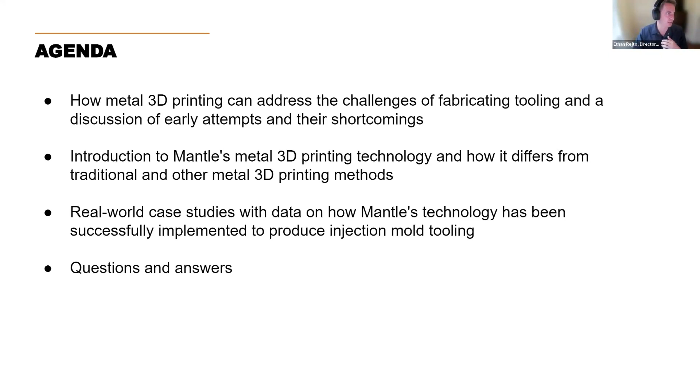As I'm sure many of you know, if you're here today on a plastics webinar, you know that the products that surround us every day are manufactured with precision metal tools, mold toolings, whether it's a plastic part or a metal part or any sort of part. All those parts are made with precision metal tools.

But as I'm sure many of you know, there's a lot of challenges associated with tooling. Whenever we're talking to companies that are producing tooling, they're telling us that it's slow, expensive, and very, very labor intensive. It's not unsurprising to hear 12 weeks to a 6-month lead time to produce your tooling before going into production, which is very, very long. Of course, it's costly, tens to hundreds of thousands of dollars to produce this tooling. So it takes a long time and it's very, very expensive.

When it comes to the business side of things, the supply chains and the tariffs, a lot of tools are made overseas, which adds to that cost and lead time and has some really difficult logistics associated with them. And then the number one thing we're always hearing from prospects is this lack of skilled labor, this desire to say 'I wish we could build more tooling in-house,' but there's just no way to hire more machinists, more tool makers, more people to run the CNC machines. Training someone to get up to speed with this takes 4 to 5 years minimum, and it's a very, very time-consuming and expensive process.

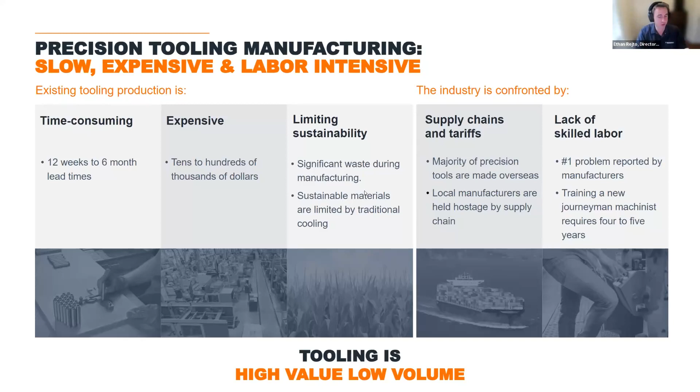All the parts that 3D printing to date have been very successful with are these very high value parts that are produced in low volume. Tooling is another one of those - you're not producing hundreds of thousands of tools, you're producing a few tools to produce hundreds of thousands of parts, making it a really good application for 3D printing. And 3D printing really presented itself as an ideal solution to all these challenges we just discussed.

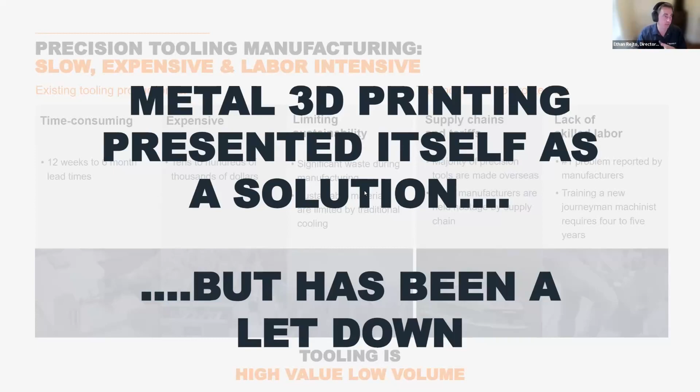But to date, it has really been kind of a letdown. When we talk to a lot of companies that have tried metal 3D printing for tooling, they generally tell us that they haven't seen a lot of value add outside of conformal cooling. The tooling industry really has some very unique needs that standard metal 3D printing technologies were not designed for.

In order to meet the needs of tooling, 3D printing has to be incredibly accurate. We go to shops that are talking about tenths, tenths of a thou. So we're looking at incredibly accurate parts, really like the most precise parts that are probably manufactured today.

So 3D printing has to be incredibly accurate. The parts need to be extremely durable and stable so that they're not moving at all during any of the manufacturing process. They have to be able to be produced faster than traditional manufacturing, because if you're not producing it faster than traditional, you're not really adding a lot of value. And the technologies have to be easy to use and to implement. That's really a big one - if the technology cannot be implemented into current workflows and be easy to implement, it's going to be very challenging to adopt.

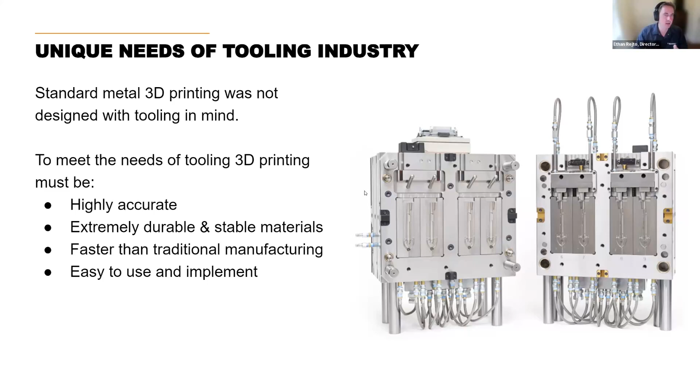Standard metal 3D printing was really not designed with these needs in mind. The most common method of producing metal parts via metal 3D printing today is this method called powder bed fusion. You may have also heard of it called DMLS, direct metal laser sintering, or SLM, selective laser melting, but essentially they're all very similar processes that involve building parts up layer by layer in a powder bed by using a laser to selectively melt and sinter metal powder together.

So you're going to spread a layer of metal powder, hit it with a laser selectively to build up that layer, spread another layer, hit it with a laser again. To date, this has really been the number one way to produce metal parts with metal 3D printing.

There's some advantages to this. You can produce parts in literally just hours. You can have something in your hands to hold. You can do these extremely complex shapes because you're able to build parts within a powder bed and really have almost infinite geometry, which lends itself very well to conformal cooling.

But there's obviously some disadvantages with this as well. The parts require really extensive post-processing to produce the surface finish and accuracies that are required for tooling, meaning that when you get a part off the printer, you're going to need to touch every single surface, either with grinding, EDM, or machining, so it can be usable with the surface finish and accuracy required for tooling. In addition, you have to work with these hazardous loose metal powders - you're going to need some HVAC, special rooms, and suits involved to work with the system. And all in all, it's relatively difficult to use to get a stable part out of these processes.

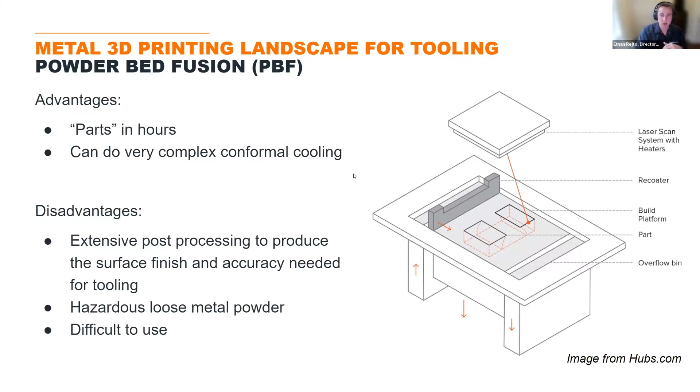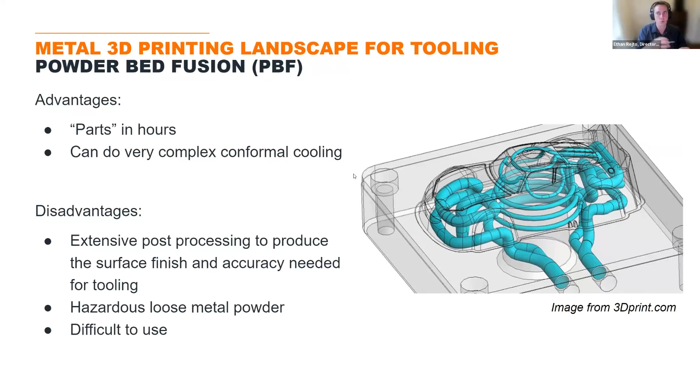So to date, most of the parts being produced for tooling with laser powder bed fusion or DMLS technologies look like what you're seeing on the right. They feature incredibly complex conformal cooling, because really the only way to justify this process, which requires so much post-processing and so much added cost and lead time, is to produce something like this, where you're outweighing those disadvantages with an intense advantage of conformal cooling.

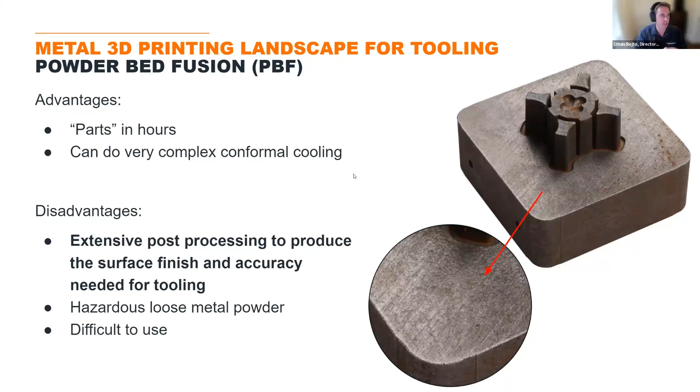So really, because of that extensive post-processing - we're looking at some DMLS parts here on the right - this has really limited the applications of traditional metal 3D printing, because you're really only sufficing this very beginning process of the tool building process. If you're familiar with tool building, which I'm sure many of you are, there's a lot of steps involved, and really traditional metal 3D printing technologies only suffice those first couple steps, maybe the soft milling step, if even.

The rest of the process is still left the same because of how much work needs to be done. So really, we saw that DMLS parts or powder bed fusion parts are really only used for extensive conformal cooling applications, and nothing really outside of that.

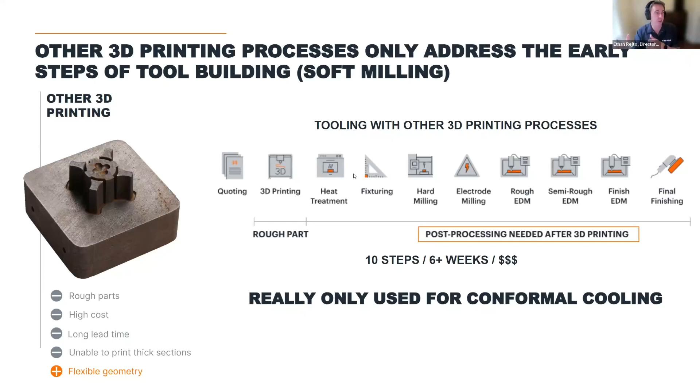So at Mantle, we kind of saw the current market of tooling, the challenges involved, the lead times, the cost, the lack of skilled labor. We saw the current offering that existed with metal 3D printing and the challenges that traditional 3D printing had with

meeting those needs of tooling. And we really saw an opportunity to design the only 3D printer that's designed specifically for tooling. Tooling is the only application we do here at Mantle. We don't build machine parts. We don't build parts for airplanes.

The only application we do at Mantle is precision tooling, and specifically injection mold tooling today. So I have a bunch of tools we'll look at later on, and I'll explain to you a little bit about how our process works and what makes it different. But I just want you to know that from the first day, we really designed our technology to meet those

needs that injection mold industry needs. We have a pretty different approach to metal 3D printing than those traditional laser-based approaches we just looked at. We actually start with a metal paste. It's a flowable metal paste, similar to the toothpaste you have in your bathroom and you probably used this morning. But we mix, our paste is a combination of metal powder mixed with some binder and some solvents.

That solvent allows that metal powder to flow in a way that is very safe and flowable without needing to be heated. So our feedstock, it comes in a tube, and it's a paste material that is very easy to flow. That's a combination of that metal powder, that binder, and that solvent.

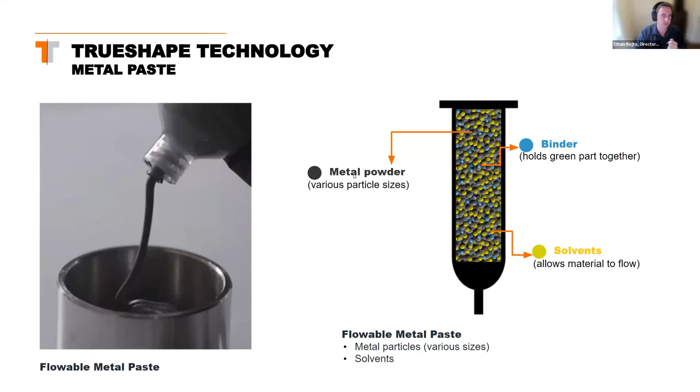The first step in our process is we're going to print it. We're printing it very similarly to an FDM printer or an FFF printer that you may have seen. You could buy one on Amazon now for a couple hundred dollars. We're just extruding material through a nozzle. In our situation, we're not even heating that material. We're simply pumping it because that solvent allows that material to flow and simply be extruded through material.

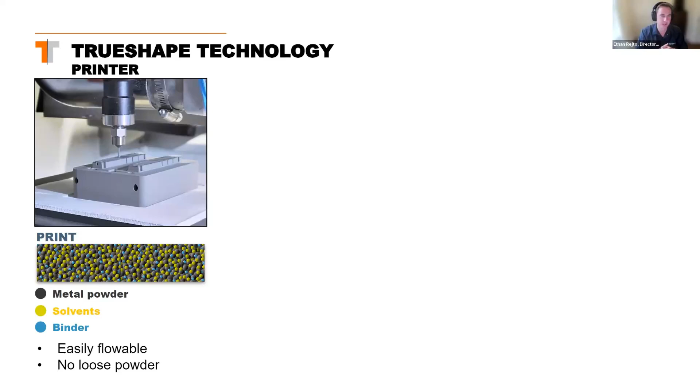So every single layer, we're going to print that material. We're going to come through and dry that material. Here, we're removing the solvent from that paste, and we're firming up the material a little bit, kind of into a dense foam. This allows the particles to kind of settle down a little bit. It densifies the material a little bit, but mostly we're removing the solvent here and turning it from a paste, like a toothpaste, into a dense foam.

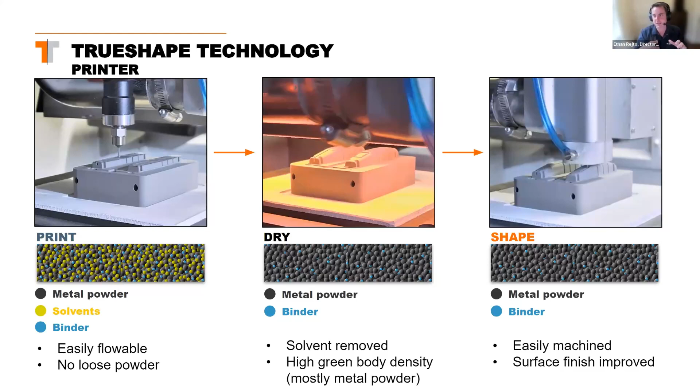Why that's so critical for us is because the next step here is going to be we're actually going to machine that. So we're building our printer inside of an existing RoboDrill style CNC. We're going to come through with 10 different cutting tools, and we're going to machine and refine that shape, which is why when you look at our tools, you don't see layer lines like you would with other technologies. You see feature details that are very, very, very precise, some tiny features that would have been impossible to produce by simply just extruding material.

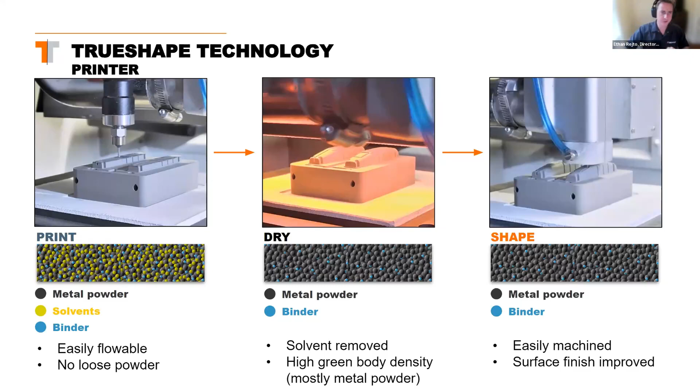So it's a hybrid approach where we're printing, drying, and shaping, and this is going to happen every single layer. So every single layer is going to be milled flat and have some contour milling done every 10 layers to refine that shape and produce these really, really nice looking parts.

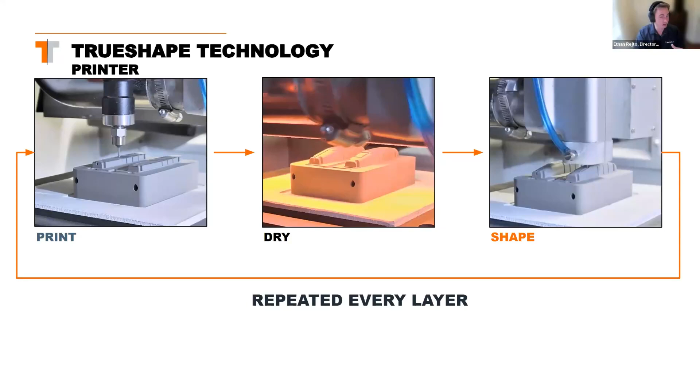What comes off the printer we call a green part. It's still a combination of metal powder that's only being held together with some binder, but we're going to go ahead and put it into a furnace to do a sintering process. You can kind of think of a clay pot. You're gonna form it in a soft state. You're gonna put it into your kiln, and now it's gonna come out a hard, dense material.

Here we're putting our green bodies into a furnace. That furnace is gonna get just below the melting temperature of the material. In this case, an H13 tool steel. It's gonna sinter the part, and the resulting part is gonna be a dense, strong tool steel. So you can hear that.

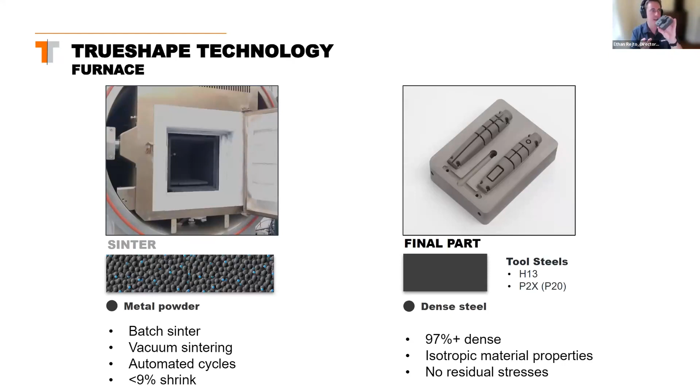But what comes out is 97% and above dense. It's isotropic, and you're not seeing residual stresses or anything like that in the part. They're very, very stable. Just have a couple videos of this actually happening in the printer so you can see.

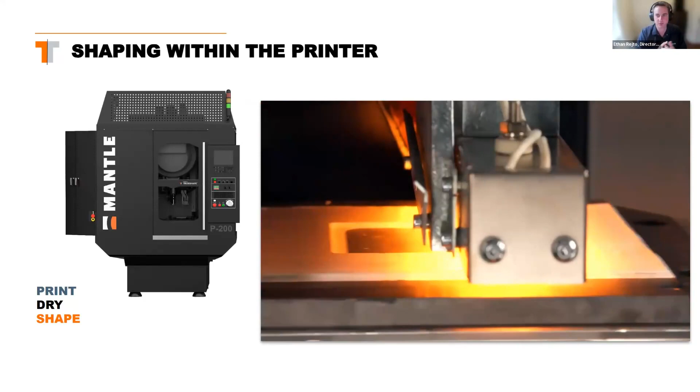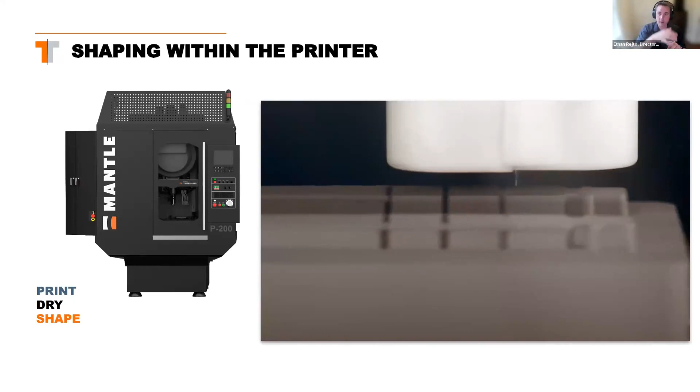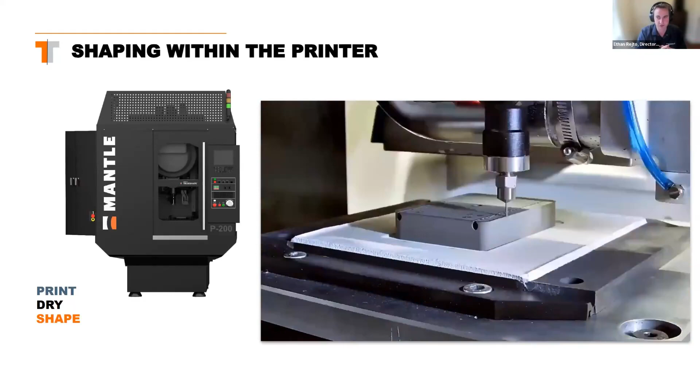We're laying down that paste material, layer by layer. We're going to come through after that. We're going to dry that material to firm it up, to remove those solvents, to allow it to really densify. And then we're going to come through with our different cutting tools and actually refine that shape. We're going to remove any layer lines that may have happened, and we're also going to add in some features that may have been too small for us to print. Our smallest cutting tool is a 6 thou ball end mill, so we can do some really, really small feature details, some features that would really be impossible to produce without EDM technology traditionally.

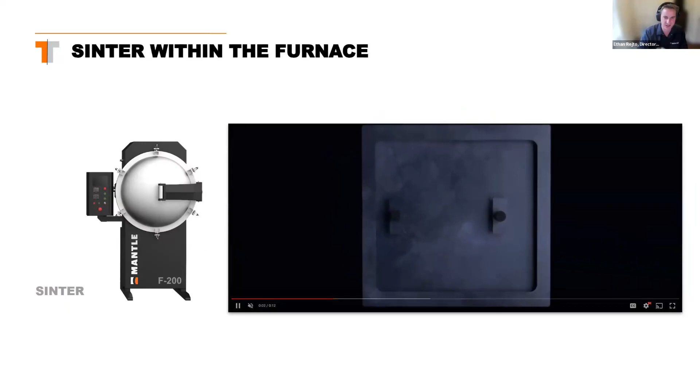Afterwards, it's a little harder to get a camera into a high temperature furnace, so it's an animation here, but you're just going to put your parts into the furnace. It's going to run for 24 to 36 hours, and now it's going to become a dense, strong metal part.

So the result of this technology is we designed it to really deliver the features, the accuracy, and the surface finish that's required for the injection mold tooling industry. So surface finish 1 to 3 micron RA, that's a Charmilles 26 or a D2 surface finish, similar to what you'd get from a sinker EDM process.

Let me see, I don't know how well this is coming across on the screen, these parts here, but you're not going to see any layer lines. Often when we show these parts to people at trade shows or they come by the office, they can't believe that they're printed because you're not seeing any of those layer lines or anything like that you would see on a traditional printed part.

Accuracy, we're able to hold a 1 thou tolerance per inch. The reason that's going to scale per inch is because we're losing our tolerance in the furnace. As the part's shrinking about 9% in the furnace, how precisely can we predict that shrinkage? We've really, really dialed that in with our paste and our technology to the point we're able to hold a 1 thou per inch tolerance. So on a 2-inch part, that'd be plus or minus 2 thou.

Produce really, really fine features as small as a 3 thou radius on features. You have that ability to do things like conformal cooling. Our materials are stable and durable, industry standard tool steels like H13, P2X, soon a 420 stainless steel, and the technology is incredibly easy to use, really producing tool steel.

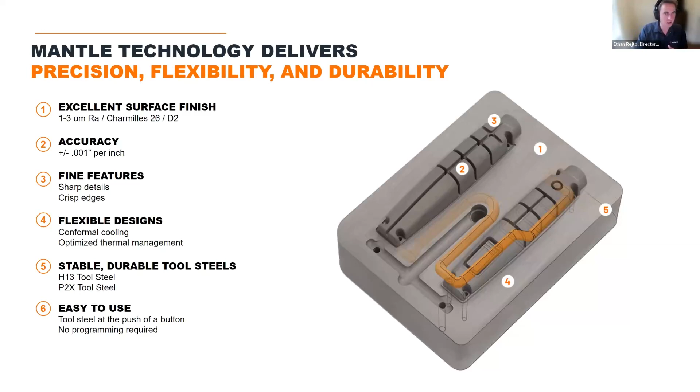I'm able to produce features and parts that would take years and years and years of traditional tool making experience, really at the push of a button. I like to say I could train anyone on this call to print any of these parts I have on my desk literally in an hour. So really, really easy to use, because we know the last thing a tool shop needs is another difficult to use piece of equipment.

So that's really, I wanted to tell you just a little bit about the existing landscape of metal 3D printing, a little bit about what Mantle's doing, but I want to spend most of our time today talking about case studies and use cases of how people are actually using this to save cost and time and money. Because yeah, sure, it's great to have a printer that's really accurate and has great surface finish, but if it's going to take 6 months to print a part, or it's going to cost $100,000 to print a part, it's not really going to add any value to this industry. But we'll have a bunch of examples to show how we are adding value, or customers are using this technology to reduce their lead times and reduce their costs.

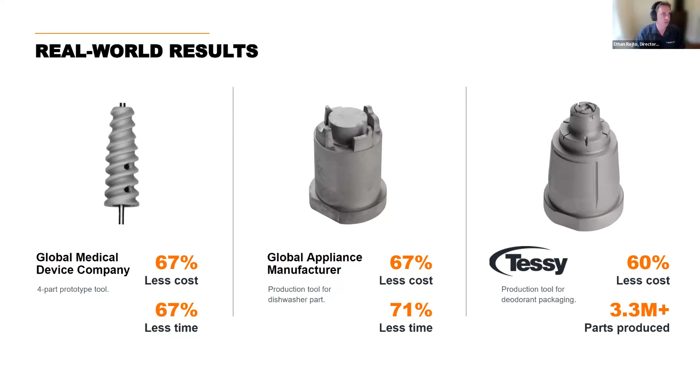Just a couple examples, some of my favorite examples on the screen here. We're going to talk a lot about a couple of these examples, so I won't spend too much time on these specifically, but generally, 60+% lead time savings, 60+% cost savings, obviously dependent on the application, but for applications that make a bunch of sense. The first example I want to show here is a prototype tool for molding a medical device component during the product development phase.

The parts here needed to be molded in acetal and radel, so they could not have been molded in an aluminum tool like a lot of people would have liked during prototyping. Radel was molded at 38,000 PSI, had a high melt temperature, and the mold was actually heated as well. Acetal was emitting a corrosive gas during molding, which would have made aluminum not acceptable.

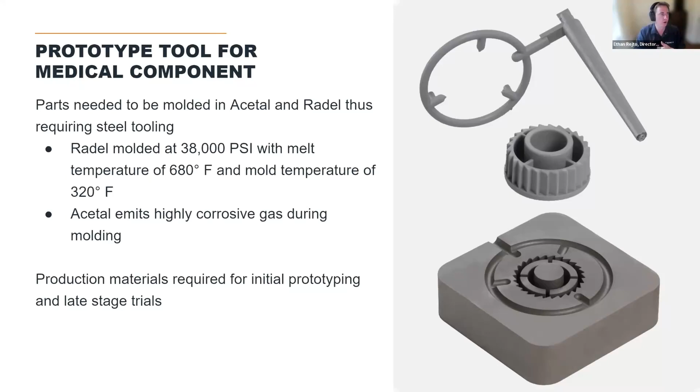So they needed to be able to use tool steel production materials during this initial prototyping, and also to do late stage trials, since this medical device company was trying to bring a new product to market. So they went ahead and printed these tools. I unfortunately don't have these tools with me today. They printed them on their Mantle machine in P20 material.

It took about 62 hours to print these two inserts. They went in the furnace for about 36 hours, with a total finishing time of 24 hours. All they had to do was add the ejector pins afterwards. I believe they printed in a pilot hole, fed the wire and did wire EDM, tapped some mounting holes, and ground the outside to fit it into the base.

So in just 8 calendar days, they were able to produce a P20 tool steel mold. Which is pretty incredible to think about, being able to produce a tool steel mold in just 8 calendar days to shoot acetal and radel and mold hundreds or thousands of parts, no problem.

So 122 hours of total fabrication, but only 24 of those hours were active. The printer and the furnace run in the background with no input. So their tool makers are really happy that they only had to do a little bit of finishing.

We like to say our technology gets you anywhere from 50 to 90% of the way there. So here they got you over 75% of the way there. All they had to do was a little bit of touch up afterwards, and they were going ahead and shooting acetal and radel.

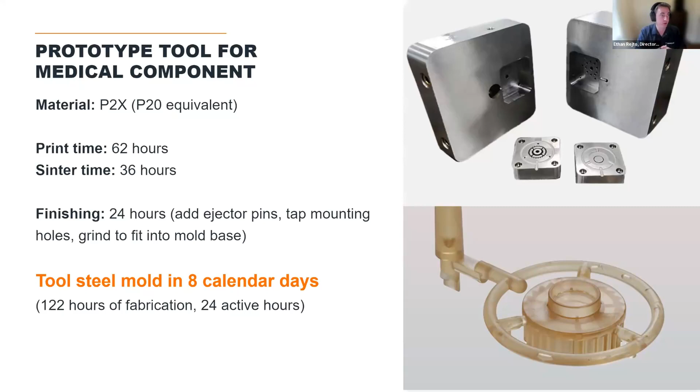A couple key metrics here: lead time reduced from 7 weeks. They were estimating this would have taken them if they had to outsource this tool, because it featured some sinker EDM work they weren't capable of doing in-house, down to just 8 days. Active work down from 148 hours to 24 hours. A 50% cost reduction here.

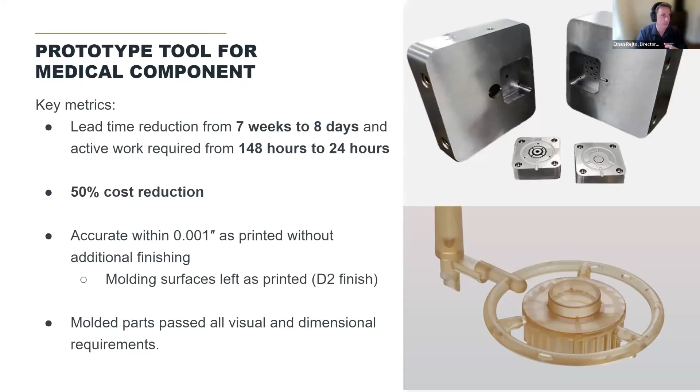The entire tool was accurate within 1 thou without any additional finishing. All the molding surfaces were left as printed, that D2 finish, and all the molded parts passed all visual and dimensional requirements, so they were able to be used for those late stage trials. Their engineers loved knowing that the parts they were getting were coming off of a real production tool, which really helped de-risk their production as well.

Unfortunately, we're not able to disclose who this customer is, because they see this as a big strategic advantage for them.

When we were talking with them about how they would have made this traditionally, they showed us an Excel spreadsheet outlining how this process would have worked traditionally. If you're familiar with the traditional toolmaking process, this is probably not new to you, but they would have had to source material, do all the programming work, do some rough milling to produce the general shape, do wire EDM for the ejector pins, do the electrode milling and design for all the sinker EDM work, a lot of sinker EDM, and still have to do that finish grinding and things like that.

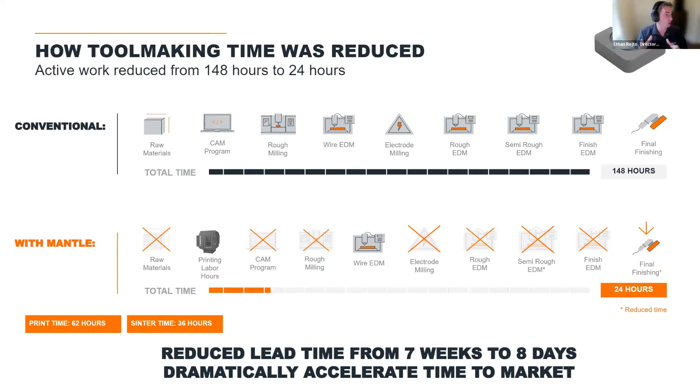So with Mantle, they printed, they sintered, and all they had to do was a little bit of wire EDM for those ejector pins and a little bit of final finishing. So from 7 weeks down to just 8 days, which allowed them to dramatically accelerate their time to market.

Another example here, I do have these parts with me today. This is a plasma cutter shield cap for Hypertherm, a producer of plasma torches and industrial cutting tools used for cutting steel and other really hard to cut materials.

They had a new design they were bringing to market and wanted to test out these new components. These were being molded in a 30% glass-filled PEEK, which is a very abrasive, high-temperature material. This thing is so stiff because it's PEEK filled with glass fiber. The melt temperature was 720 degrees Fahrenheit, and the mold was heated with oil to 355 degrees Fahrenheit.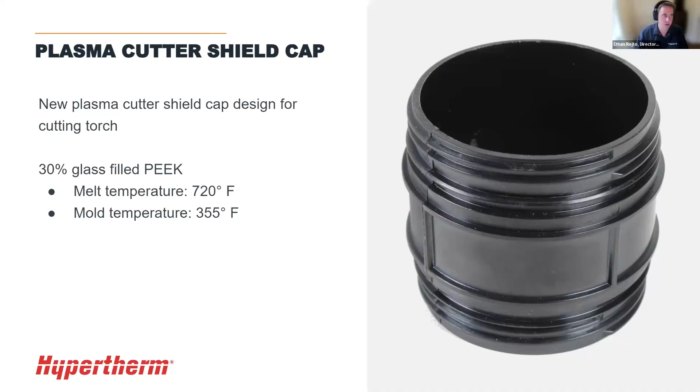So aluminum obviously was not going to be an option for their development tooling. They looked at Mantle to see how they could print some H13 tools. Specifically, they printed the slide component in H13 tool steel.

It's a bit longer of a print because it's a relatively big part for our technology. Took about 129 hours, so about 5 days of printing, then went in the furnace for a day and a half, but all of that work is completely unattended. It just runs in the background over the weekend or your holiday, while our printer keeps producing parts.

After the parts came out of the furnace, they did a little wire EDM to add a taper on one side for the slide, then ground and fitted it into the mold base. Ultimately, they were able to deliver an H13 tool in just 2 weeks, dramatically accelerating the time to produce this tool.

They were able to produce all this feature detail, which would have required pretty extensive sinker EDM work, but were able to leave it all as printed for the 2 slides used to mold this component.

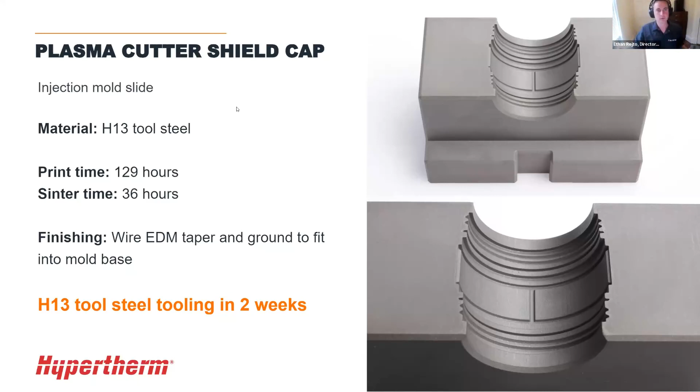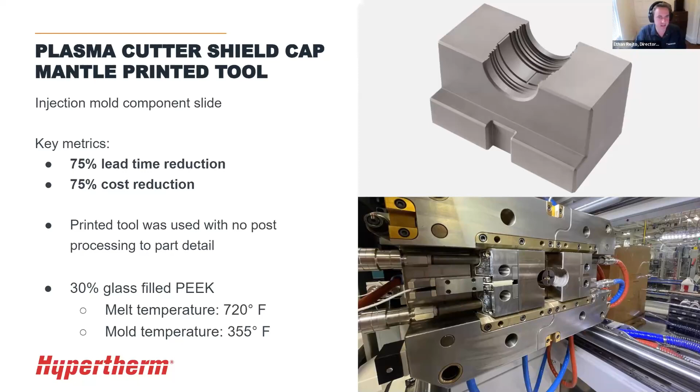So you can see the tool actually running here. You can see the slides coming in and closing around the part to form those threaded features on the outside.

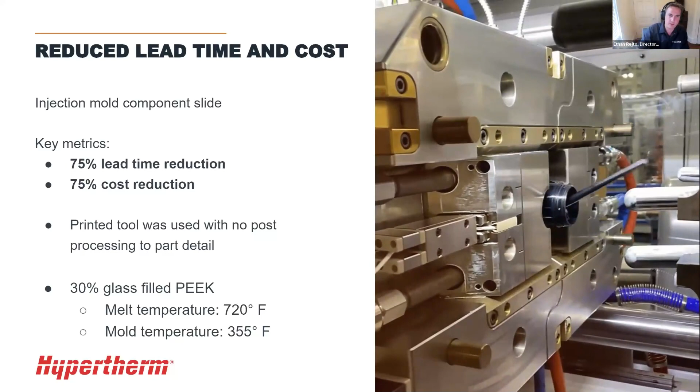When we talked to them about how they would have had to produce this part traditionally, you can see a pretty extensive process, very similar to what we'll see for most of these tools: a long process with rough milling, electrode milling, and design, plus all the EDM work involved in final finishing. We were able to remove all those intermediary steps and just do a little final finishing.

So from an 8-week lead time, they estimated down to just 2 weeks, and from $15,000 to source this externally down to just $3,750 with Mantle. So this is a great example of using Mantle slides for producing 30% glass-filled PEEK components.

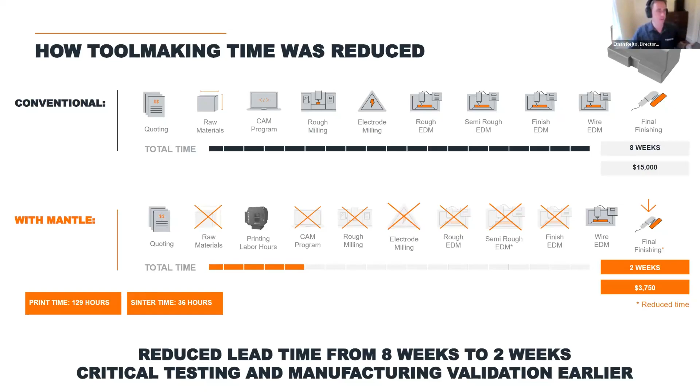Awesome, we'll keep going with some more stories, moving over to the molder side with WESTEC Plastics. WESTEC Plastics is a great customer of ours located in California. They actually just recently received their machine, and they've been in Livermore, California for over 50 years.

They provide a wide range of services, everything from DFM, mold flow analysis, mold design and prototyping, and they have a full-service in-house tool room, which is where their Mantle machine sits today. They have 23 state-of-the-art molding machines ranging from 28 all the way up to 610 tons, can do real-time monitoring, and have clean rooms for medical molding and other cleanliness-sensitive applications, so they can really serve that whole industry.

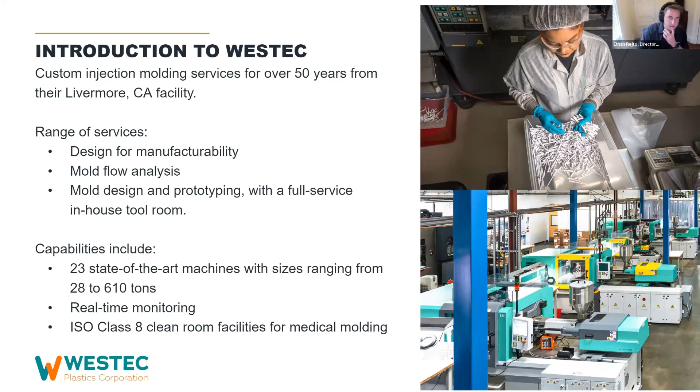WESTEC decided to purchase a Mantle machine because they felt it would allow them to free up their very experienced tool makers to focus on other critical steps. WESTEC is similar to a lot of molders I talk to, where they say, yes we have a tool room, but we mostly only do repair and maintenance because we have a couple tool makers who don't have time to build new tools.

We'd love to build new tools, but their main job is to keep our presses running. So they feel that Mantle is going to allow them to free up their experienced tool makers to spend more time on critical repair and maintenance, and only have to do final finishing to tools to get them running, because the Mantle machine is going to do 90% of the work in the background, and then they only have to do a couple hours of finishing, like we've seen, to get those inserts actually running.

So they feel they'll be able to produce these H13 production ready or production equivalent mold cavities and cores in some cases just days, compared to outsourcing either domestically or foreign, which takes 10 to 12 weeks. Also, of course, reducing the costs.

Tammy, who's awesome to work with, the president of WESTEC, says that tooling is the base of our company. Without quality tooling, we can't produce quality parts, but it's getting harder and harder to find quality tool makers. Using Mantle, we can complete up to 70% of the job and have our tool makers handle just the specialized steps that only humans can do. We need to take advantage of this technology so our customers can get a service they can't get anywhere else.

Labor obviously is a huge challenge right now in the industry. So the ability to get tools that are almost completely done with little to no input from their tool makers is really, really valuable. And they feel they'll be able to actually produce more tools through that process.

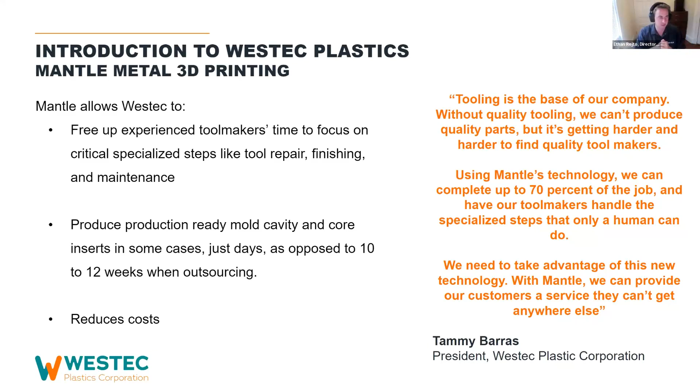So the specific example we'll talk about with WESTEC is they were in the process of building a multi-cavity tool for one of their medical device customers, to produce a medical component which we can't talk too much about, but we can talk about the tool. The customer, after the tool was already being built, came back and said, okay, we want to make some changes to the design, which is something you don't ever want to do.

They came back and said, hold up on the tool build, we want to make some changes, we need to validate these changes. In order to validate those changes, WESTEC was asked, can you please build us a single cavity tool as quickly as possible so we can get some parts run to actually validate this, so we can move forward with the full multi-cavity tool build.

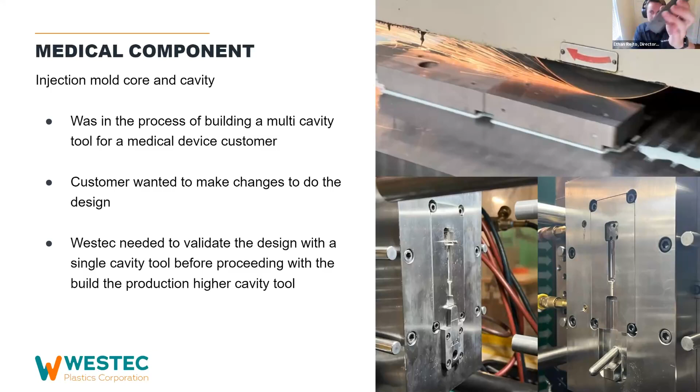So WESTEC used Mantle's technology to print these inserts, core and cavity. You can see them going through some final grinding there on the right. Again, able to produce these inserts in just a couple of weeks, 50% cost savings by printing these with Mantle. Total active hours: they estimated their tool room would have had to spend at least 40 active hours to produce these inserts. They were able to get that down to just 10 hours thanks to using Mantle's technology, because they were able to print this, leave the feature detail as is, and just do a little bit of grinding to finish these inserts.

It was an H13 tool, so again, H13 tools in very, very short lead time, and then they injected that TPE material. So they were able to provide that customer with that validation, get them running faster, and get them to proceed with that multi-cavity tool.

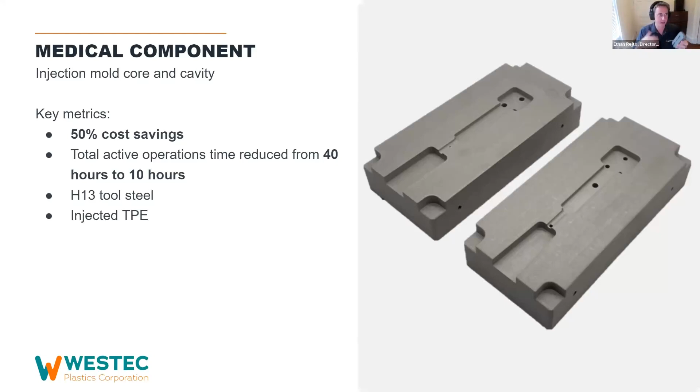Another molder, NICOLET Plastics, which is an awesome customer of ours, is located in Wisconsin. Their motto is really fast, fluid, and flexible. They have a couple of different facilities, a very highly cross-trained workforce, and over 40 presses, between 30 and 610 tons. Their goal really is to lower costs with competitive lead times and really exceed their customer expectations.

They're recently opening up a new facility in Ripon, Wisconsin. It's going to be 54,000 square feet, so it's a big facility. They're going to have up to 40 presses, and clean rooms so they can satisfy some of those medical device and cleanliness applications. Very, very automated focus, kind of one of the molders of the future idea.

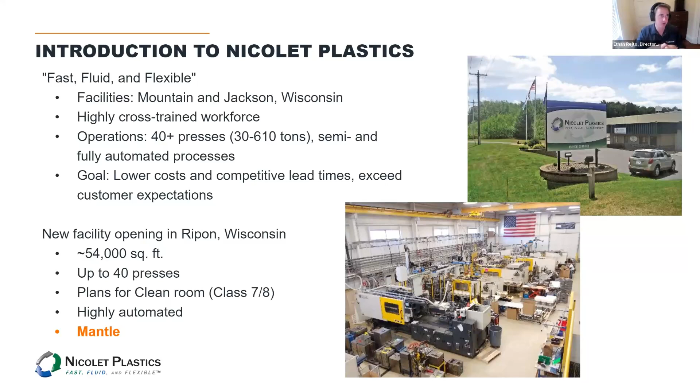That's where they're going to be putting their Mantle machine, to fit into that and automate some of their tool making processes. They have the same challenges with tooling that almost everyone has that we talk to: very long lead times, very high costs.

Providing prototype or low volume tooling is very challenging due to lead time and cost expectations from their customers. It's also very hard for them to find and hire experienced tool makers, since that workforce is drying up and it's just not out there. So they'd love to increase the amount of tooling they're building in-house, but they find that very hard and challenging.

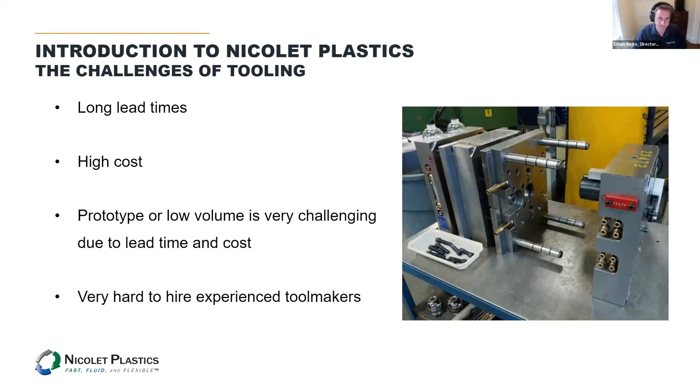The application we'll talk about with NICOLET is this slam latch component. This is actually a component they build for Gamber Johnson. It's used to allow tablets to be pressed into docking stations. If you see a police officer on the side of the road with their laptop up on their dashboard, this is the kind of component that is inside those docking stations that allow that to be docked. For their customer, Gamber Johnson, being first to market is really critical.

In the accessory market, when a new model comes out, the first accessory to hit the market really captures most of the market share. So Gamber Johnson was highly motivated to be that first customer on the market for when a new model of laptop, iPad, or any tablet comes out.

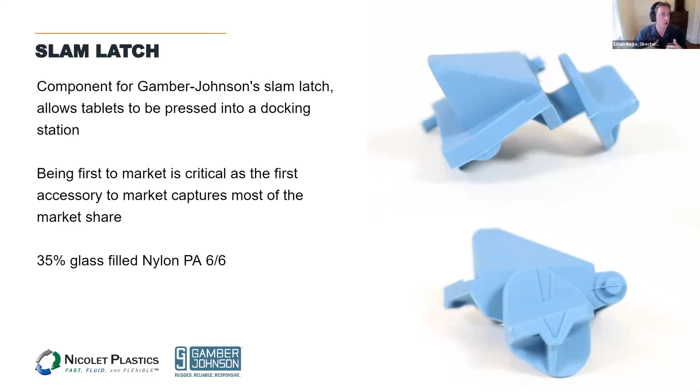This part was going to be molded with a 35% glass-filled nylon. So the desire here was to have an H13 tool so that the abrasiveness of the material could withstand hundreds of thousands of shots, unlike what an aluminum tool would be able to do. They went ahead and printed 3 different components: a core, a cavity, and a vent insert that went inside of this little pocket to allow for venting.

The print time was 150 hours, so about a week for all three inserts. Then all three inserts could go into the furnace together for about 36 hours. After printing was complete, this insert took about 10 hours of final finishing, wire EDM of the ejector pins, and then some grinding just to fit it into the mold base. Ultimately, they were able to deliver an H13 tool steel mold in just 2 weeks.

If you can see some of these features on top, very deep ribbed features that would have required pretty extensive EDM to produce, this really made it a great fit for Mantle, because Mantle was able to simply print those features right into the part.

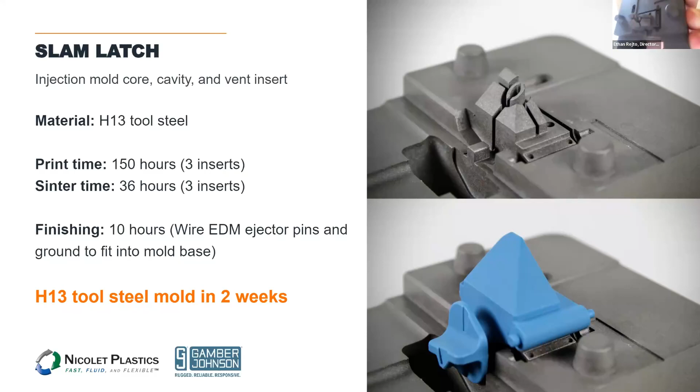Some of the key metrics here: reduction of lead time from 6 weeks down to just 2 weeks. If they were building that tool themselves, because of all the EDM work required, they estimated 6 weeks down to just 2 weeks, since it only required 12 hours of their toolmaker's time compared to 180 hours of what they estimated traditionally.

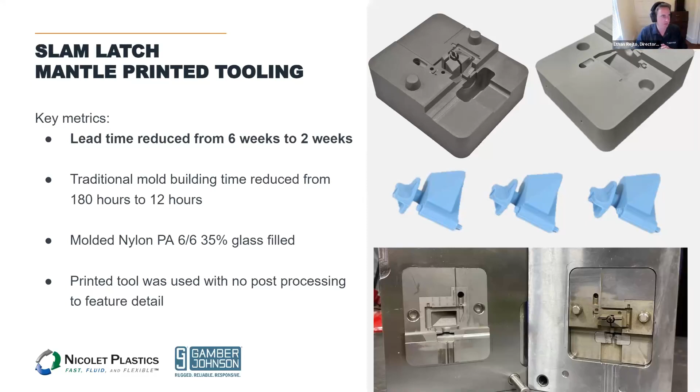They were molding thousands of these nylon 6/6 glass-filled components. The tool was used again with no post-processing to feature detail. They were able to leave it all as printed with that D2 surface finish, because for this application, a matte surface finish was totally adequate.

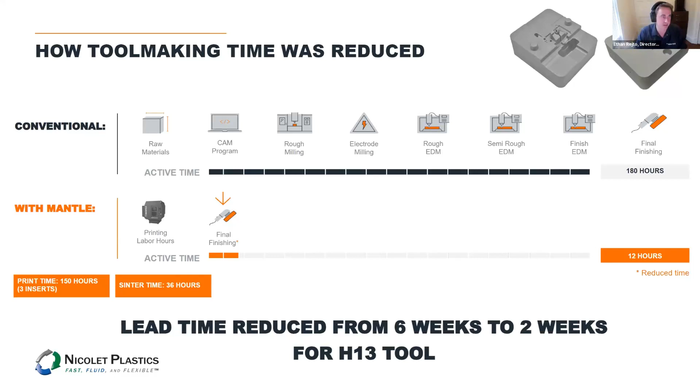For NICOLET, Mantle really allows them to produce production H13 tooling in prototype time. They can produce, in a week or two, an H13 tool for their customer in a time that their customer is used to getting, if they're lucky, an aluminum tool.

Printing gets them inserts that are 75 to 95% of the way complete with very little to no user interaction. Inserts just require refining of the ejector pins, tapping of water lines, a little bit of grinding, etc. This dramatically reduces tooling lead times even on their production tooling, producing H13 tools in as little as a week, and frees up their tool makers to work on critical projects like repair and maintenance to keep their presses running, which is really what's most critical for NICOLET.

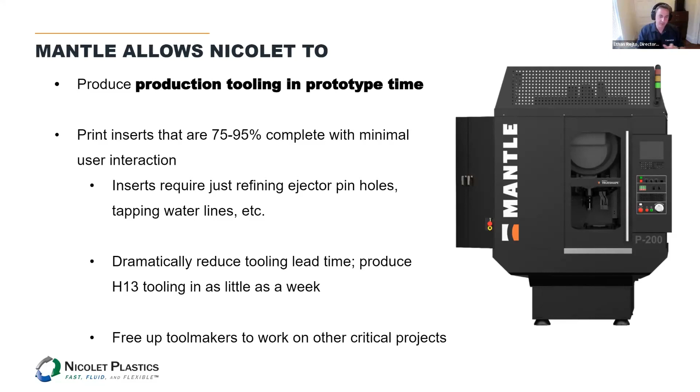I think with 3D printing, it's really common to talk about reducing lead times and reducing costs.

Everyone's always asking, how much faster can you make it? How much less expensive can you make it?

But with this technology, NICOLET is finding that Mantle is allowing them to expand their business and open up new revenue opportunities, not just lowering costs and shortening lead times on existing projects. One reason is they can now get involved with customers earlier in the development stage. Generally, NICOLET was mostly thinking about production, wanting to produce millions of parts. They weren't taking on low volume or prototyping orders. Now with Mantle, they can take on those orders, which allows them to get involved earlier in development and ultimately win the production business further down the line.

Similarly, the H13 tools can be used for bridging, so they can offer their customer a tool in a week or two, and then if they want to keep running it, produce millions of parts. They can offer the benefits of conformal cooling to their customers, something they haven't been able to do before. This increases the capacity of their tool room to build more tools in-house, a strategic advantage over competitors, and lets them produce highly complex inserts with extensively deep ribbed features that would traditionally require a lot of outsourced EDM work.

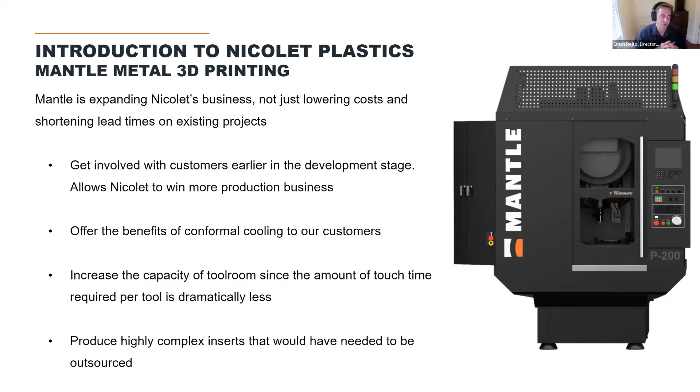On that same note, I want to briefly talk about conformal cooling. We talked about it earlier with powder bed fusion and laser-based technologies, but conformal cooling with Mantle's technology is at a different level. With traditional conformal cooling applications, you could only justify it if volumes were very high and it was going to save a lot of cost. Now it can be justified at a much more reasonable scale, because you're already reducing cost and lead time with this technology, so why not add conformal cooling anyway since you're already saving time and cost.

This insert here, which I have on my desk, features some pretty complex conformal cooling throughout. I accidentally took out the slide that showed that, I'll show it to you guys later, but it's really extensive and complex conformal cooling in this insert. It reduced cycle time by over 25%, while still saving costs and lead time by 25% of attended manufacturing hours. This insert was able to be printed within 2 thou right off the printer, so a lot of the mold or feature detail was left as printed. This insert may have been totally fine with traditional cooling, but since we're printing it anyway, why not feature something a little more complex to get the added benefit of a faster cycle time.

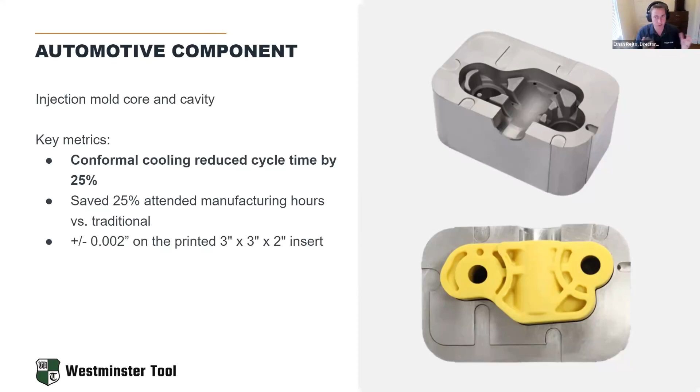Another example here is with Westminster Tool and PepsiCo. I have a version of this part, a blow mold that fits on for molding the bottom of a Pepsi bottle. There are more pieces that go on top for forming the rest of the bottle. I wish you could see this part because it has really nice surface finish. Pepsi was doing evaluation of some new bottle designs, and they were having issues with their traditional tooling, specifically heat blushing. They were hoping Mantle's H13 could help with that heat blushing using conformal cooling, as well as help their tools last longer so they could go through all the development molding with the same tool.

So they worked with Westminster Tool on printing with Westminster Tool's printer. In just 9 days, they went from design to completion of this blow mold tool, which is pretty incredible to build a blow mold in just 9 days with H13 tool steel. The tool only required minimal machining, they ground the top and bottom to fit into the rest of the assembly, and had to hard mill an outer diameter and an O-ring groove on the bottom.

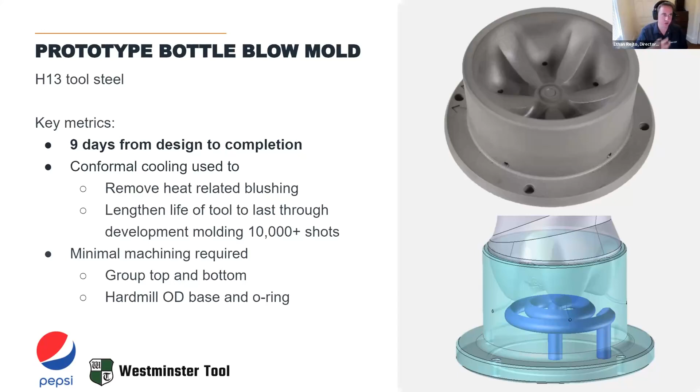You can see there's a little bit of a spiral in here, not an overly complex design, but better than traditional cooling would allow for that heat to be removed. You can also see some of the vents designed right into there, these venting holes that are printed in and finished to allow for superior venting of the tool. So we always talk about conformal cooling, but conformal venting is absolutely an application as well.

I briefly want to talk about the tool steels we have at Mantle today. We have two different tool steels. The first is P2X, which is a P20 equivalent. We call it P2X because it has slightly superior corrosion and abrasion resistance to a standard P20, but it's fully compatible with standard tooling operations like grinding, milling, machining, welding, and EDM, with that bit of superior corrosion and abrasion resistance.

We also have an H13 tool steel, which is actually the more popular of our two since they take the same amount of time to process and cost the same. Most of our customers say, since it costs the same and takes the same amount of time, I might as well have that higher hardness, get 42 HRC right out of the furnace, and heat treat up above 50. Our H13 tool steel is also fully compatible with traditional finishing.

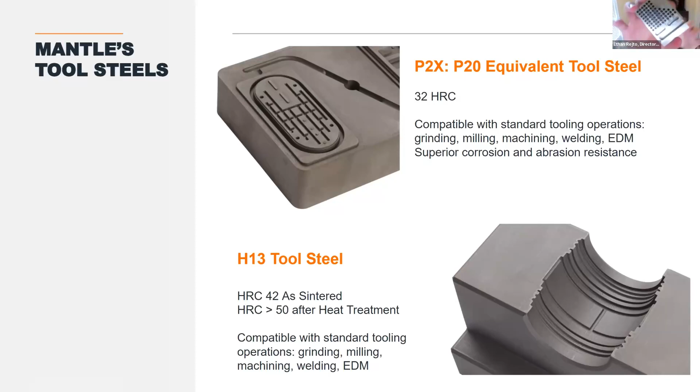I have an example here of just a sample. You can see it's able to hold 7/10 flatness, and can undergo machining, grinding, EDM, any of those processes you need to do to your tool. Very durable materials as well.

One example I really like to talk about regarding our tool steels and durability is with Tessy Plastics. They wanted to evaluate Mantle's materials to see if it's legit, if it's as strong as traditional materials, if it would last the same, or if this is just a prototyping thing.

Tessy Plastics was running a 32 cavity tool used to mold screws that go into a deodorant stick, you twist it and it advances your deodorant. They stopped running this tool during COVID since people weren't buying as much deodorant, and when they brought it back online they decided to evaluate Mantle. They had the tool off the press and swapped out some inserts for Mantle inserts to see how they'd perform.

They took out 3 of the traditional S7 inserts. They replaced 1 with Mantle H13, 1 with Mantle P2X, and replaced 1 with a traditionally fabricated machined S7 material. After over 1.65 million cycles, this tool is still running, and they've seen no unexpected signs of wear on the Mantle printed tool.

The tool also has some S7 shutoffs on it, so a harder material shutting off on this insert, with no signs of unexpected wear. They were able to produce these inserts weeks faster than the machined S7 one. This is for forming the bottom of this cap, weeks faster to produce, and it's still running after over 1.65 million cycles. We email them every couple of months for an update, and they say it's still running with no signs of wear.

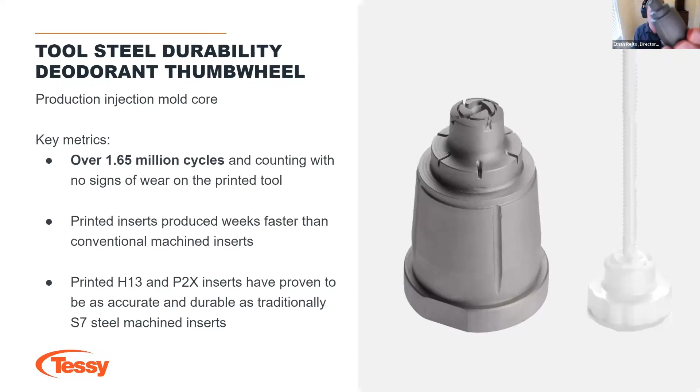People always think of 3D printing of tooling as just prototyping, but you can absolutely do these high volume applications as well. This is a really nice insert example for Tessy Plastics.

As I mentioned, our tool steels are fully compatible with traditional toolmaking operations. An ideal application for us is you leave all the molded geometry as is, do a little bit of grinding, a little bit of wire EDM just for your ejector pins, but you're not having to do extensive processing to it.

But it's important to know that if you need to, you absolutely can. You can do your machining, your drilling, your tapping. You can do wire and sinker EDM to the part to refine features if you need to.

You can polish. We've been able to polish up to an A2 finish without any signs of pitting. So if you need to get that kind of mirror finish on your part, you can polish it to that A2. You can do your texturing the same way you would with traditional texturing operations, chemical, laser, laser etching,

deep chemical etching. And they're going to be able to be repaired the same way a traditional tool will be repaired - laser, TIG welding - you don't see those halo effects. So you can see an example there. We cut out a notch of a tool, we welded it up, and then we went across and ground it, and it looks the same way a traditional tool would look.

So if you do need to do repair, it absolutely can be done without any changes to your standard operating procedures, which is really, really important to know.

One of the first things our customers always ask of us when they're looking to buy a machine, they say, send us a sample. I want to give it to my machinist and have him work on it and see what he thinks. And the machinist will come back with something that looks like this and say, why'd you want me to do this? This is a waste of my time. They say, hey, that was 3D printed steel. Could you tell? And they said, I had no idea. They machined the same way any H13 would machine. I ran all my same settings, all my same standard procedures, and it came out just fine.

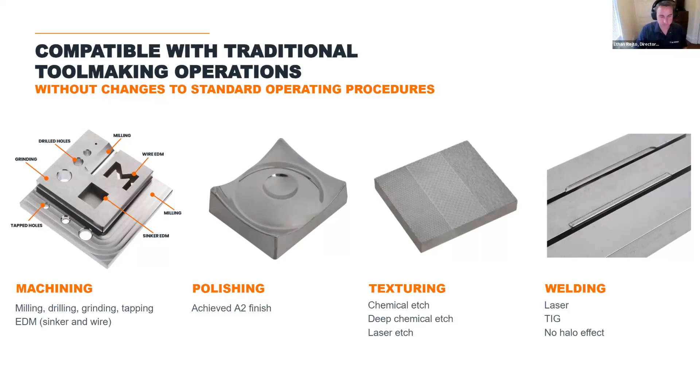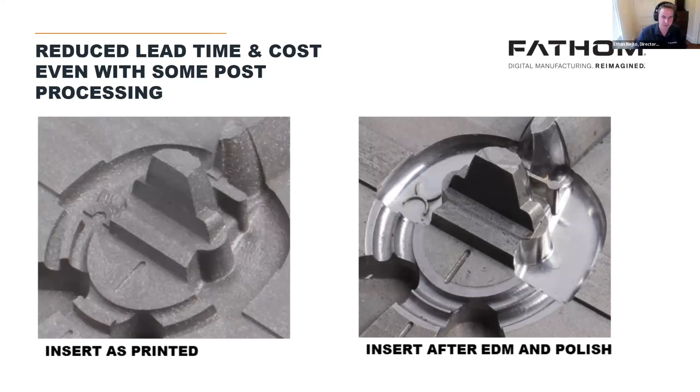But the reason I'm including this example now is actually because they still had to do quite a bit of EDM work, about 30 hours of EDM work here. You can see some of those features that are just too small for us to print and machine today. So they went ahead and burned it afterwards. They printed it a little bit oversized, then went through and polished it up afterwards. So you can see that burning process for some of these really, really thin features that are in here.

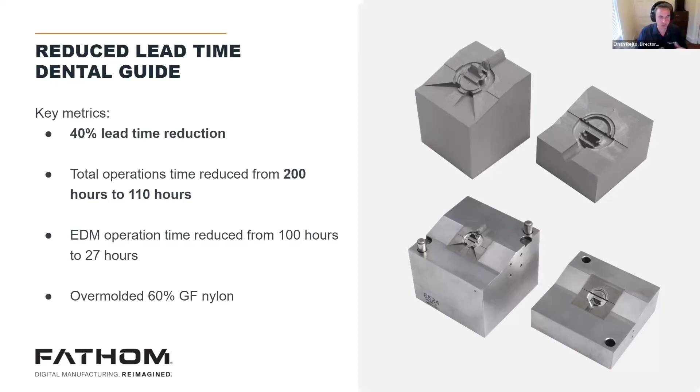But even with that, they still reduced the lead time by 40%, operation time from 200 hours down to 110. And most of that came from removing the EDM hours - 100 hours of EDM was traditionally going to be required, and they moved that down to just 27 hours. This was overmolding a 60% glass filled nylon. So a really good application here as well.